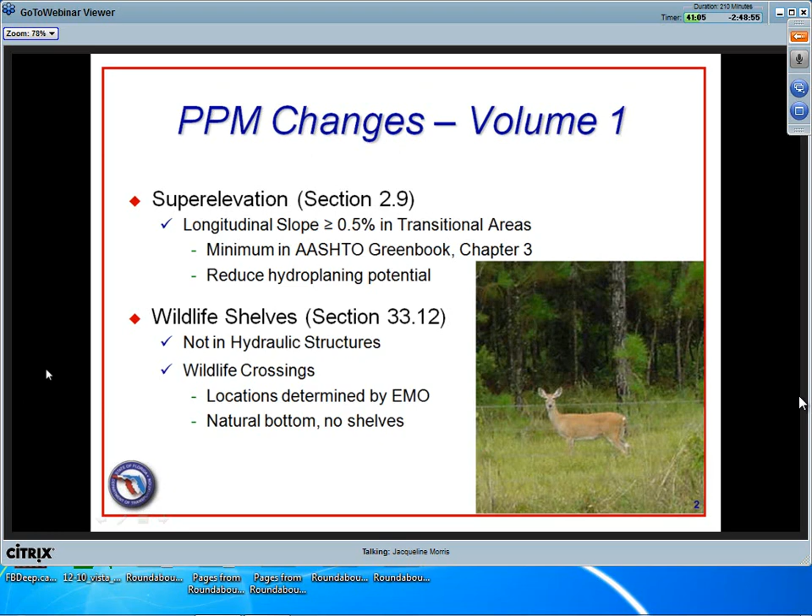In Volume 2 of the PPM, we put in that drainage maps were required anytime that projects add capacity or there's significant changes to the drainage. And we want them on aerial bases. Years ago, we went away from aerial bases because in hard copies, repetitive hard copies of plans, they quickly became illegible. But now with the electronic plans, we can go with aerial bases for the drainage maps, and those are invaluable to the next generation of hydraulic engineers.

There's so many details that we pick up off an actual aerial photo, and we want to stick with them. We want to include that in any of the contract plan submittals. We had some cases where flood data summary boxes were being put in where there was no real change in the hydraulics of the area, and we don't need to do that. So we only want flood data shown for the cross structures where there's modifications that affect the existing hydraulics. We don't need to pull old, unchanged information and put it on new plans.

Likewise, we found one thing we did not need when we're extending pipes. In Spec 430-4.1, it says when extending existing pipes, construct the pipe extensions of the same size and kind as the existing pipe. And so if that's what the spec says, we don't need to tell the contractor twice. We don't need to include those extensions with like materials in the optional materials tabulation sheet. It's redundant. There's already guidance in the specs.

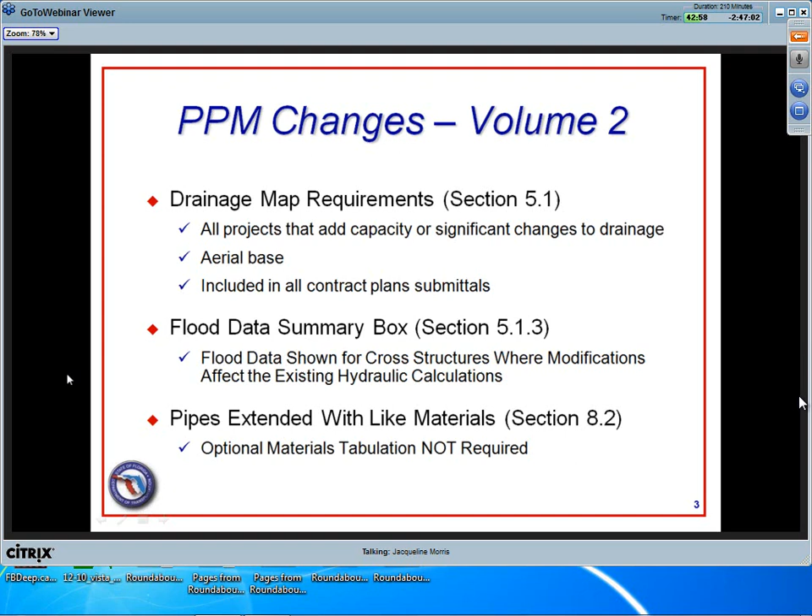Okay, going on to the 2013 drainage manual. This was released in January, maybe even January 2nd, marvelously. And we're going to continue to try to do that release in January 2nd. Here's some of the changes. For storm drains,

the pipe slopes, as you know, we target pipes flowing full under gravity. South Florida often never sees that. They see pressure flow usually. And South Florida being flat, District 4 down there had a criteria that instead of 2.5 feet per second as the target design velocity, they were going down to 2.0. They weren't having problems with it.

So we brought that into the drainage manual as a hardship case for when the ground is very, very flat. Sometimes it's just very hard to get a 2.5 foot per second velocity. Verify with the DDRE whether it's not a hardship case in design build situations. That will be in the RFP.

Now, as the hydraulic engineers know, you can push water up an adverse slope by differential head between the headwater and tailwater. But we want the sediment to move downstream into the next hydraulic drainage structure where it can be captured more easily rather than being clogged in a pipe. So we put a physical slope requirement of 0.1% on pressure flow pipes. That way we can move the sediment and hopefully the pipes won't get clogged as bad.

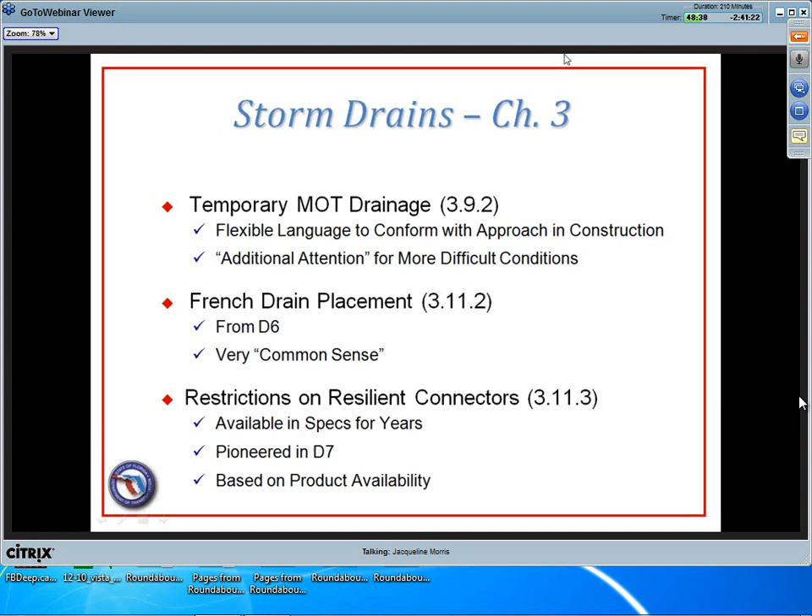Okay, and for cross-drain hydraulics, the turnpike had a 100-year stage on the mainline turnpike. It was something they adopted to strengthen their bond standing. And who could argue that the turnpike is not the main artery for north-south evacuation during storms? And so we let that stand. Again, we think they made a great decision there.

The reference for emergency access was formally removed. That doesn't mean that roads can't be assigned a higher design high water frequency. Doesn't mean we can't do that, but the emergency access was a bit inconsistent across the state.

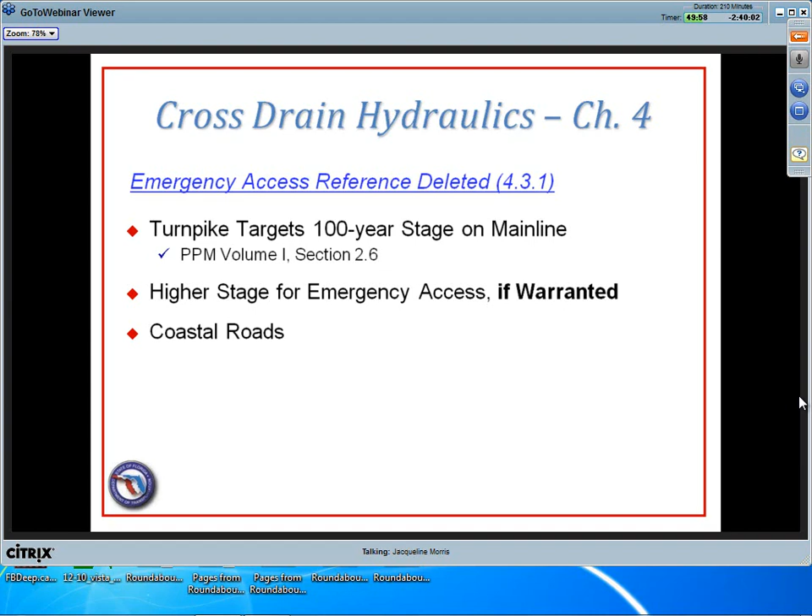And again, a reminder for coastal roads. For inland storms, we can elevate, and overtopping can do some damage. It's not a great day when that happens, but roads survive. For coastal roads, remember that we do not elevate coastal roads. And this is the reason why.

When coastal roads overtop, when a hurricane moves in and the storm surge moves in, especially on the ebb flow, we can get this kind of overtopping and damage if the road is elevated above the surrounding land. So we try to get coastal roads down at about the same elevation of the surrounding land. We can also have wave attack on coastal roads.

And so we would rather have to blade off the road at the end of the storm rather than have to rebuild it. So again, be careful with coastal roads. Do not raise them unless you have a specific reason to, and unless you're willing to pay for the kind of armoring that can help them survive after a storm.

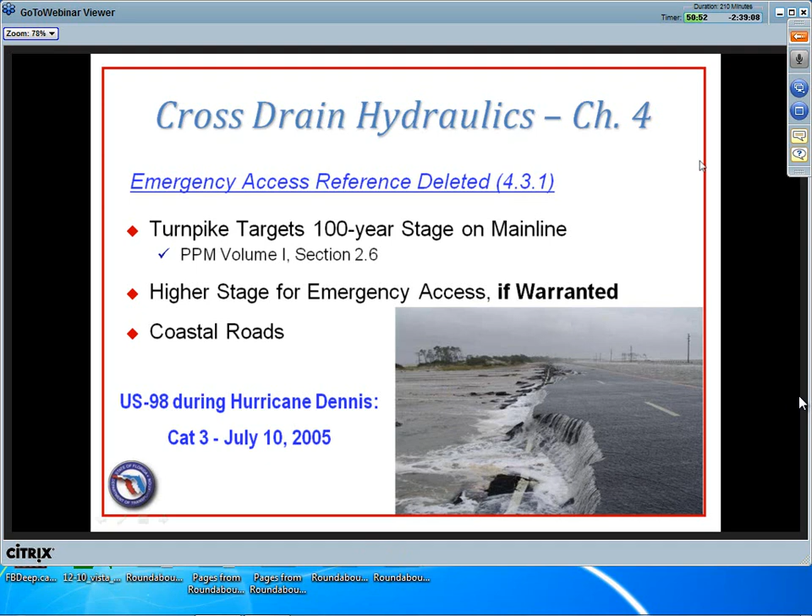Okay. We changed the target for standard rubble. What happened was that we started to have occurrences where our current target specific gravity of 2.3 was being narrowly missed. We were seeing 2.25, 2.27, 2.23. And so what the SMO and I did on a project-by-project basis, we started dropping the specific gravity, making sure that the design conditions would tolerate it.

And we decided, well, let's just drop the specific gravity to 2.2, and the values of velocity and the significant wave height up there that you see are the new design targets for specific gravity rubble of 2.2. That's the same size as our current blanket.

Now you'll notice that the spill-through abutment has a higher allowable target velocity. The reason is that the spill-through abutment doesn't create as much local energy as a bulkhead type of abutment. Those velocities are the local velocities. For instance, don't use the average velocity across the stream. Take a look at what's happening right upstream of your revetment.

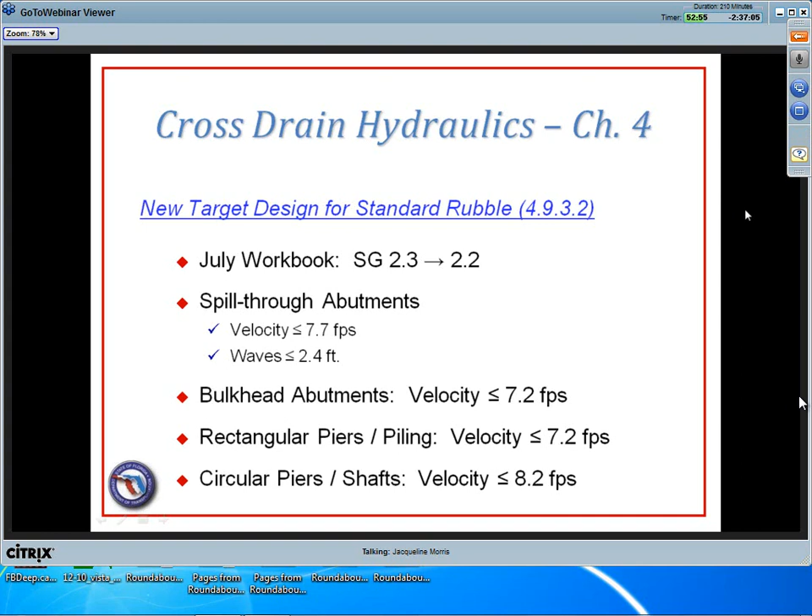In the same way, rectangular piers and pilings have a lower design velocity allowance, and the reason is because that vertical face causes more local vortices and can displace rubble as opposed to a circular shaft. So those values are in the drainage manual, and that should still warrant the use of standard rubble for most Florida applications. Interestingly, we also found out that as long as material was available and we didn't have to truck it in, the size was not a big issue, so we're sticking with our current size.

Okay, this was a fairly big change. District 4, for many years, had not used Rule 14-86 on internal projects. Now, we still always use 14-86 for offsite inflows, and the reason for that is because offsite inflows to a storm sewer system are much more sensitive than, say, outflows to a water management district canal or a ditch. You can easily compromise and surcharge a storm sewer system with the 18-inch laterals and get hydroplaning problems.

And so we still keep the more rigorous 14-86 for offsite inflows, but for department projects, for our internal designs, we're only invoking Rule 14-86 with its multiple storms where we're in closed basins, which are obviously more flood prone, or in areas where there's clearly flooding going on already. For instance, if your project is flowing to an area which has been flooding in the 10-year storm, and you know we have an issue, that's a time to invoke the more rigorous Rule 14-86 sizing of the facility.

Again, the DDRE will provide direction, and for design-build situations, it will be upfront in the RFP. And so the idea here is not to waste money in over-designing when we're not having problems. And again, thanks to District 4, we had a pretty good long-term test case to check that out.

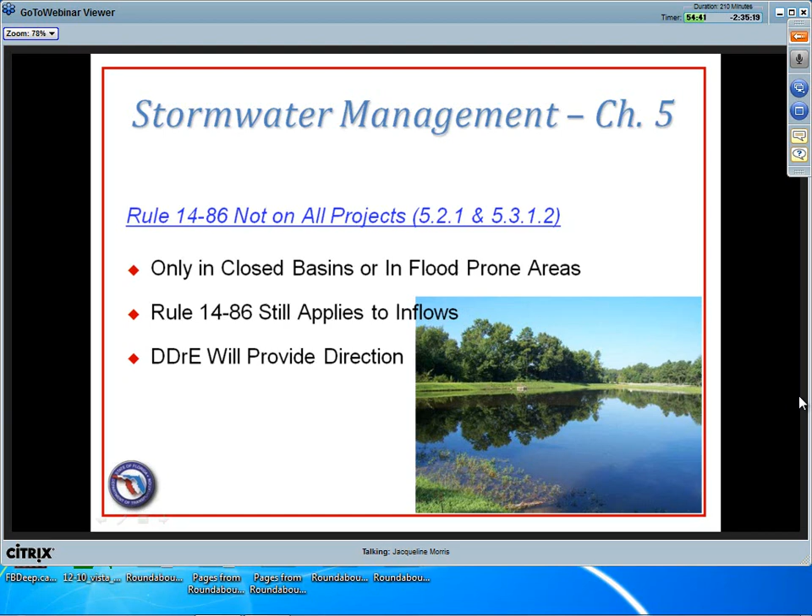Okay, and I think lastly, the polyethylene pipe class 2, which is our 100 years target, the industry finished the testing for long-term acceptance. The tests involved long-term modulus testing, which took a good bit of time, several years. And so the interim restrictions were removed. You may remember that those restrictions were that the polyethylene pipe was not to be used for 100-year service life under interstates, 8-lane sections, adjacent to buildings, things like that.

Those interim restrictions are removed, and the only restriction is that the Class 2 polyethylene pipe is still not allowed in the Keys, and that's due to the service temperature. The original computations that industry did not target the elevated temperatures in the Keys, and so they've elected not to redo that testing, so at this point they're still not allowed in the Florida Keys.

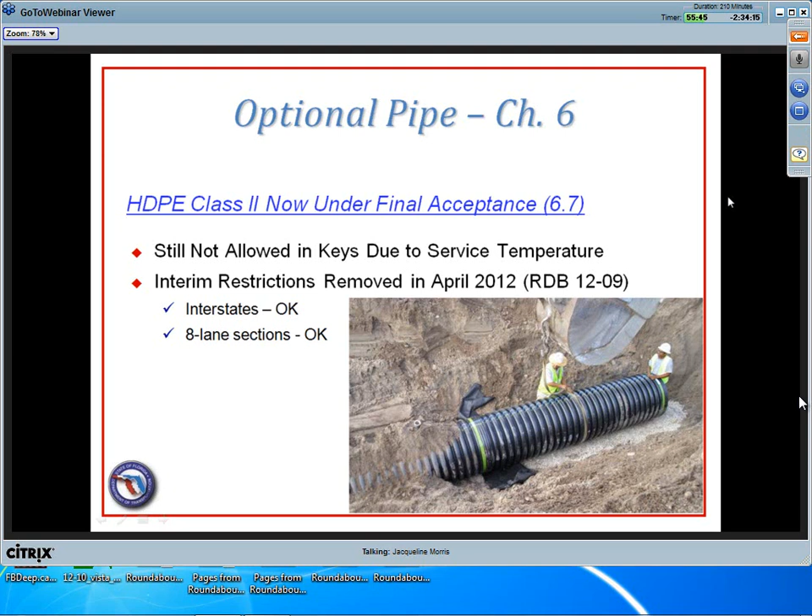Okay, and now some questions and comments. Is the 0.5% minimal longitudinal slope requirement referring to the PGL or to the entire travelway? We would like to see that, and I might enjoy Frank's comment on this. The idea is that the whole transverse cross slope at that point is subject to 0% cross slope, and I think we would want to see that 0.5 longitudinal slope across the whole typical section where it goes flat, and not just the PGL. And Frank has given me a thumbs up.

Okay, I'm not a drainage engineer. Well, I feel sorry for you. Just kidding.

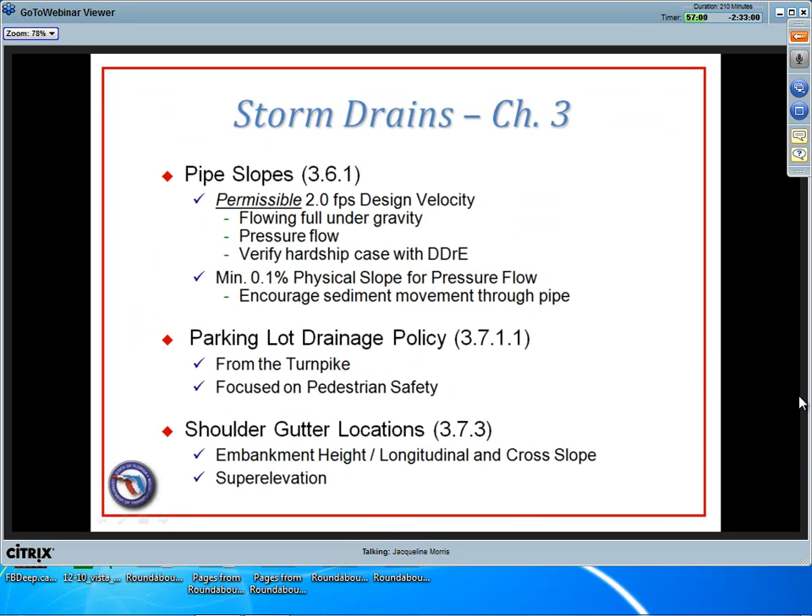Let's see. Do you have an update on a potential sidewalk cross drain standard that eliminates the drop-off hazard, and those hideous pipe guide rails we have now? You talk about the aluminum handrail, I bet. You're talking about the back of sidewalk and probably the closed flume inlet, both of which have a handrail. Yes, we are working on that. We think that we may be able to put a little lip there for ADA benefit, and thereby be able to eliminate those.

That has not been a high priority, but obviously somebody else thinks that they're hideous, and maybe you're right. So we do have something. Oh, and it's from David O'Hagan. David, good to hear from you. David, you've got us there. This was one of David's pet peeves. And so David, Jennifer has been working on it. Other priorities have moved ahead of it.